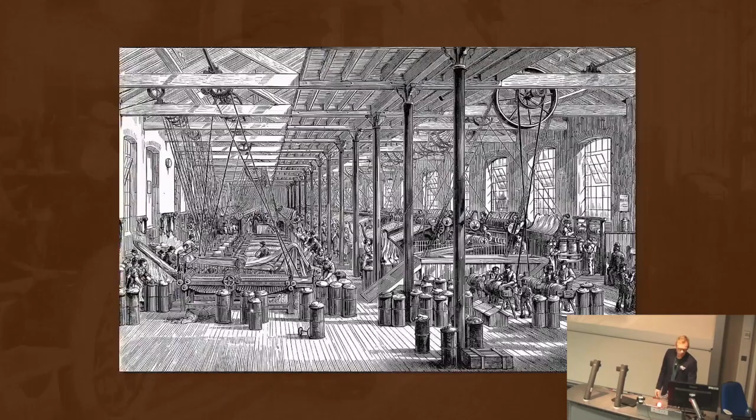So most of us here can agree that the Industrial Revolution was incredibly important in mechanizing society, specifically through the invention of the engine, not only for our production systems, but also for personal mobility. It wasn't affordable to everyone, so then came along Henry Ford, who said, I want all my workers to have a car and be able to afford that. So with the invention of the assembly line process, they were able to bring production costs down to make not electric vehicles, not yet, internal combustion engine vehicles available to everyone.

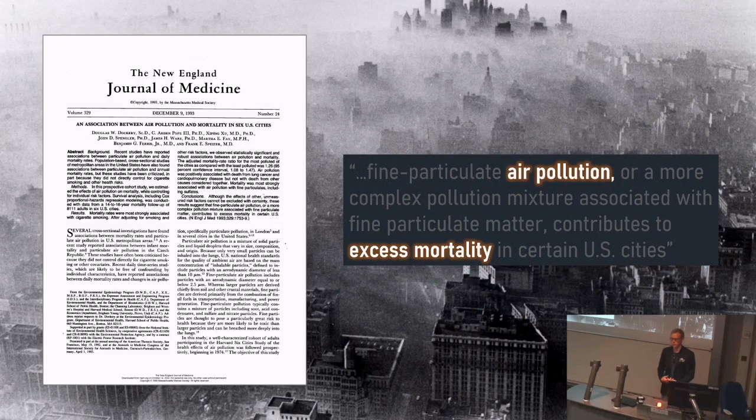So things were going so great until our cities started to look something like this, with a lot of air pollution and a lot of smog. Critical studies were coming out that were linking air pollution to excess mortality across all of our cities. So we needed to do something about this. Lots of Clean Air Acts were introduced everywhere. For automotive, this meant that the tailpipe emissions got regulated. The fuels also got regulated to remove particles that can cause air pollution as well.

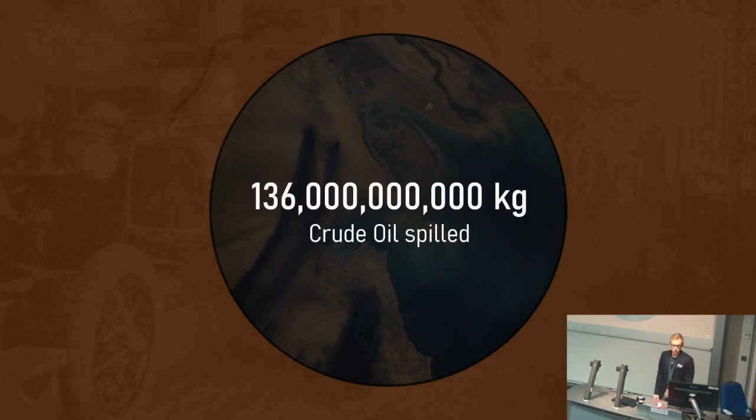So surely now things were going great. And it's not as if there's something else on the horizon like fossil fuels that could be a bit of a problem. And yep, you guessed it. Oil, fossil fuels was becoming a problem, specifically with oil spills in the popular media happening all across the world. One example is in Kuwait, where in the Gulf War, through the conflict, lots of oil wells got set on fire, spilled a little bit of oil, and for some of those days was responsible for 2% of global CO2 emissions just from those oil wells, to give you the scale of this.

So all these geopolitical issues with oil were a problem, specifically for the economy, with fluctuations in the price of oil, which was wreaking havoc. It was also getting a little bit warmer, and actually the planet was getting pretty hot as well. So we also now had the problem of greenhouse gases.

But it's okay. We had the Kyoto Protocol that rallied multiple nations together to tackle climate change. We had technology come out, such as the first hybrid electric vehicles, to try to limit these greenhouse gas emissions. And then we had the really big Paris Agreement to really reinforce national action to limit climate change. You know where this is going. Things are going really great.

So nations were committed to limiting greenhouse gas emissions. However, big corporations, such as ExxonMobil, knew about climate change a really long time. And they loathed that they knew about it, because it wasn't really so good for them. So they hid it for a really long time, and even funded climate denial groups to delay the inevitable.

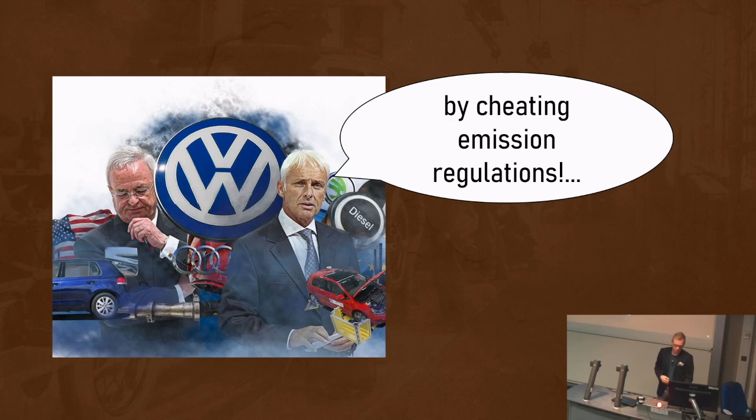People in automotive here might recognize this, the Dieselgate scandal, where Volkswagen were essentially saying their vehicles ran on clean diesel and had low emissions, but actually they were installing cheating devices to get past these regulations, and the air pollution was actually a lot more toxic than first thought. So we are also living in the greenwashing era, which wasn't too good.

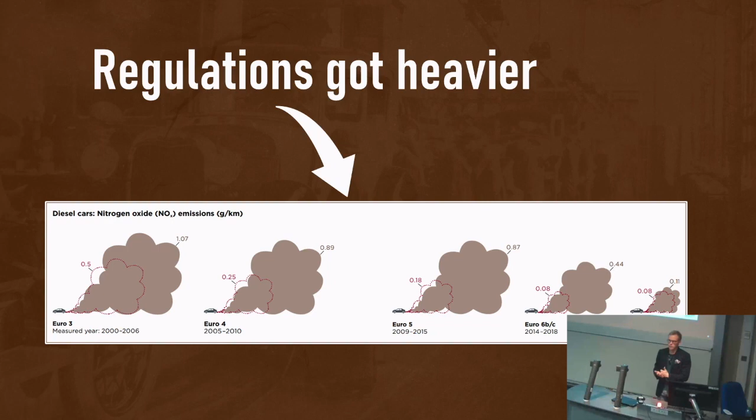So the culmination of all of these factors led, for example, the EU to really bring the hammer fist, specifically on limiting tailpipe emissions as much as possible. And over time, we saw the NOx emissions from vehicles come down per kilometer. Combustion even got really political. As we know, from 2030, multiple regions in the EU are going to ban combustion engine vehicles.

So we're seeing the market share of combustion engine vehicles, at least in the EU, come down, and electric vehicles going up. So we're going to eliminate all tailpipe emissions. We're going to eliminate all fossil fuels. So things are going very great. So following this trend, now we talk about electric vehicles.

So one of the biggest drivers, of course, is greenhouse gas emissions and climate change. Transport in the EU contributes 26% of greenhouse gas emissions. Most of these are caused by road transport, not aviation, coming from tailpipe emissions when you combust the fossil fuel, and the dependency on fossil fuels in the road transport sector has made it one of the hardest sectors to decarbonize as well.

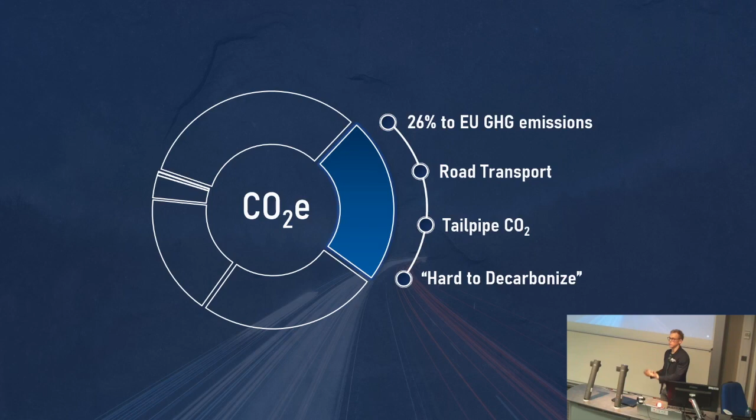So in the EU, in 2019, we introduced the European Green Deal, which was essentially the EU's major response to climate change, where they said by 2030, we want to cut greenhouse gas emissions by 55%. By 2050, we want to reach net zero. And there are 9 different action routes introduced across different sectors.

For transport, this was the Sustainable Mobility Strategy, where essentially they said, yep, we do have to reduce dependency on fossil fuels and have zero emissions from any new cars from 2035 through the use of zero and low emission vehicles, with the primary strategy being electric vehicles. So let's take a look at these clean green electric vehicles that have zero emissions. So essentially, the basics of why they are different from normal vehicles that we use.

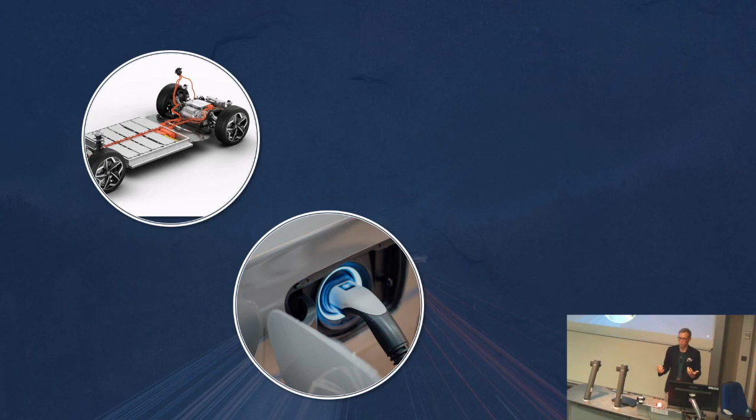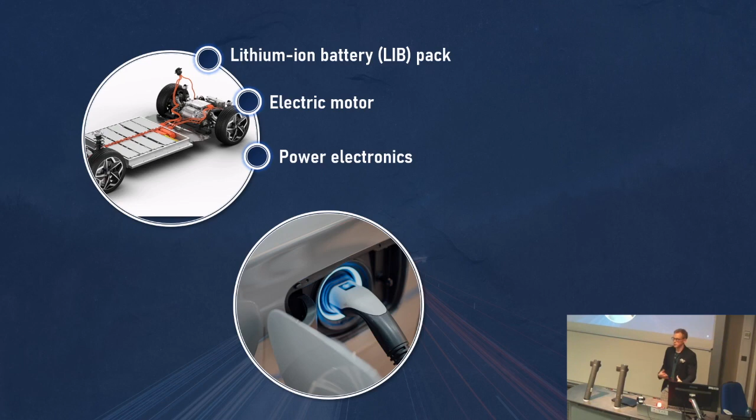We have a big battery pack that will store electrical energy, an electric motor that will propel the vehicle, power electronics to manage this whole system, and then you simply plug in the vehicle and charge it from the grid, so you're not using any fossil fuels, and there's no tailpipe emissions, which is how we arrive at the term zero-emission vehicles. So what has actually been the whole fuss surrounding them in media? I don't see any problems.

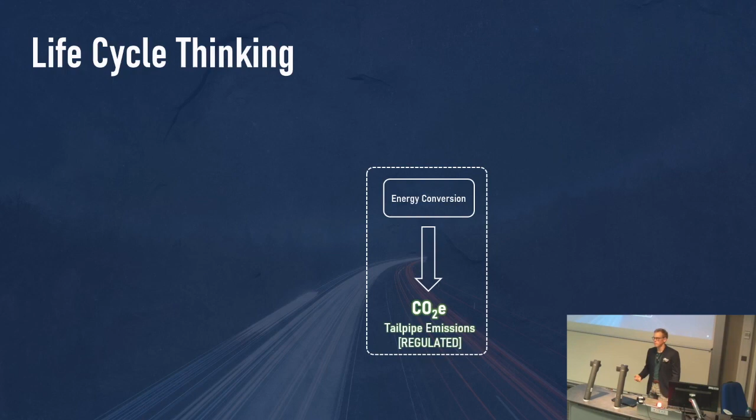And essentially, we have to apply a different type of thinking, which I like to call life cycle thinking. So we have the energy conversion step, where in a combustion engine vehicle, you combust the fuel to propel the vehicle forwards. That has very clear and very visible CO2 emissions that are quite easy to regulate. But if you travel upstream, the fuel had to be distributed from somewhere, it had to be produced somewhere, raw materials had to be extracted somewhere. All these different upstream stages will also have some sort of emissions happening. But these are quite difficult to attribute to the vehicle, so they're not regulated specifically for the vehicles in this case. And this is often called the well-to-wheels life cycle of the vehicle.

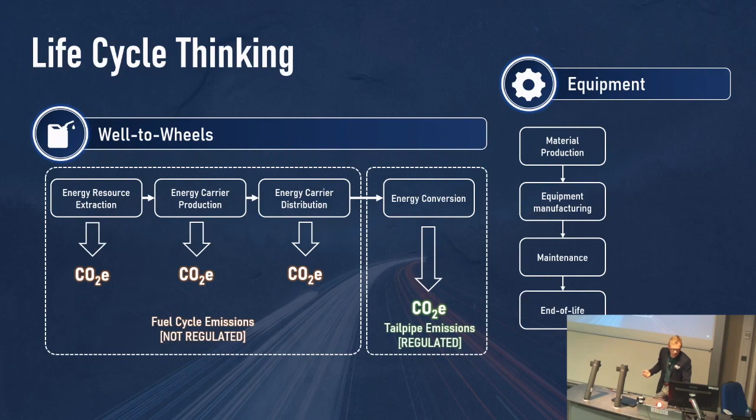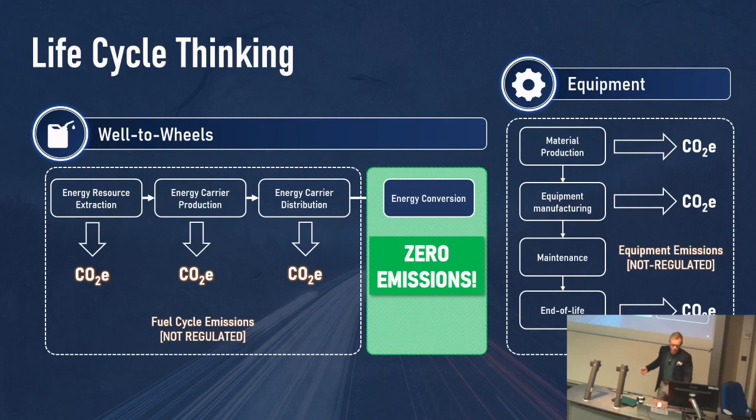But then we have to consider the vehicle itself, the equipment, where material would have had to be produced, equipment would have had to be manufactured, and then something happens at the end of life. All these different stages also have CO2 emissions, which again are not regulated. So when you put an electric vehicle in it, and we're only looking at the energy conversion step, well, of course it's going to be zero emissions, because its CO2 is concentrated in all the other aspects. So it's incredibly important for us to investigate the whole supply chain, upstream and downstream.

So here I come to some of the frequently asked questions on the environmental impacts of the different life cycle stages in an electric vehicle. I'll start off with the raw materials, and the base question of how bad are the batteries for the environment? The battery pack introduces large amounts of different materials compared to combustion engine vehicles, specifically copper, nickel, cobalt, and lithium. Now, nickel and copper are usually mined together with cobalt, so when I talk about cobalt, assume that I'm talking about nickel and copper as well.

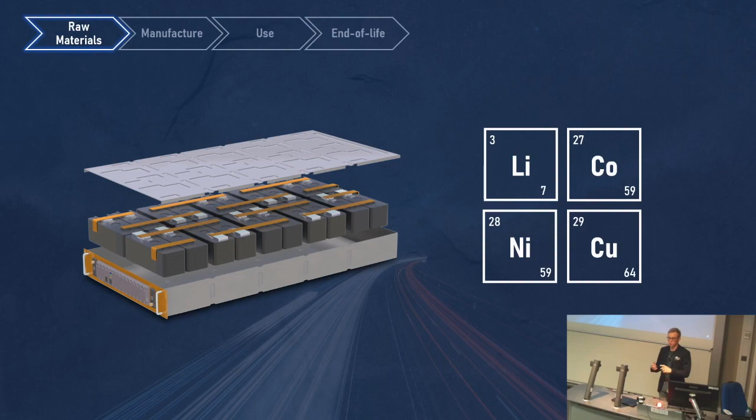So let's look at lithium. Is that scarce? Do we have enough? That has been a popular discussion, whether it will be able to meet the future demands of electric vehicles.

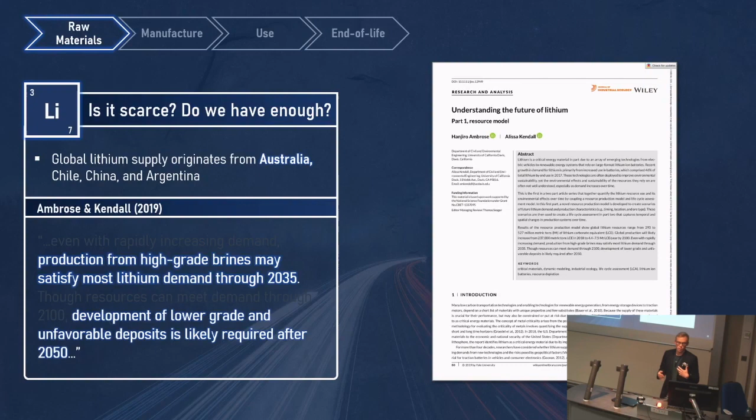So, most of the lithium actually comes from Australia, but some comes from Chile, China, and Argentina, and is distributed among these regions. Based on some academic articles, they do find with their modeling of supply and demand of lithium that essentially up to 2035, we should have enough high-grade lithium, but after 2035 and beyond 2050, we will still have enough lithium, but it will have to come from lower-grade ores.

Essentially, to simplify this, we've got enough lithium, but as we go on, we'll need to mine it harder and process it more. Something maybe that's not talked about as much is the water problem of lithium.

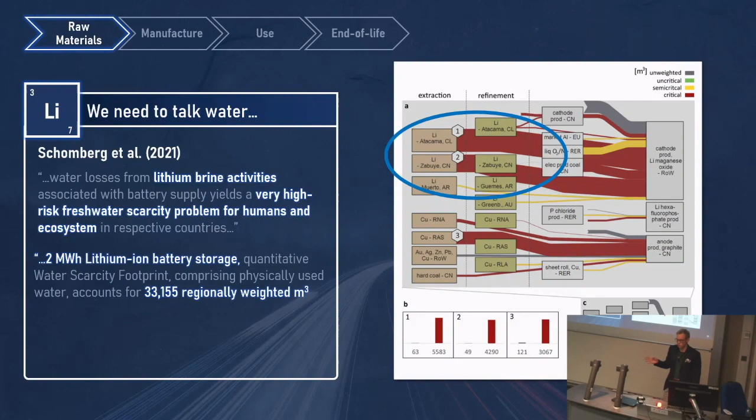Based on one study where they tracked the water use of lithium through the battery supply chain, they find that in regions where lithium is mined, freshwater scarcity is a big problem for both humans and the local ecosystems. And based off the battery system that they analyzed, essentially it was a lot of water. So to put that in perspective, to produce 1 kilogram of battery, you need around a ton of water. The amount of lithium that is in that battery is around 50 grams.

Now, to convert this a bit further and compare with water consumption of some other products, this would put lithium carbonate, the mineral, at using 20,000 liters of water per kilogram, making it probably the most water-consuming product on the planet compared to other minerals as well as agricultural products. But that is only one paper, so that could be a problem.

And essentially, the lithium mines look very beautiful and very pretty. But why they use so much water is that it relies on evaporation techniques to get the salts out.

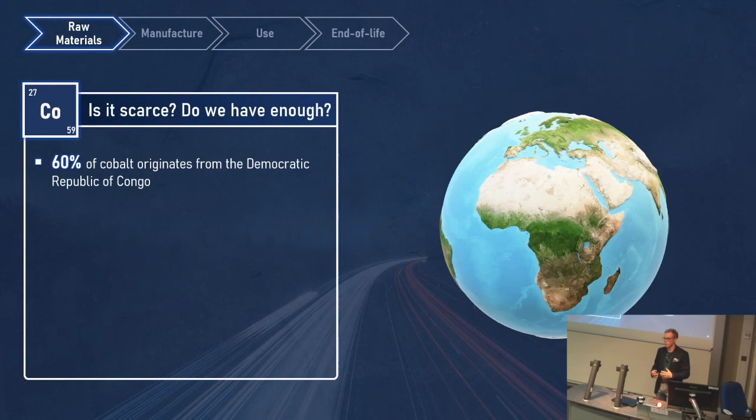What about cobalt? Is that scarce? Do we have enough of that? Well, in this case, 60% of cobalt comes from the Democratic Republic of Congo, because most of the world reserves are concentrated there. And it has been a problematic element. Historically, its price has fluctuated all over the place, and supply and demand has been quite difficult due to geopolitical problems in the Democratic Republic of Congo.

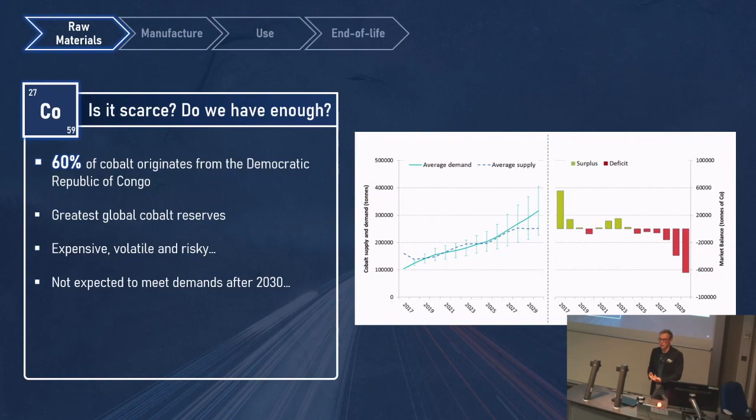And it's actually projected that after 2030, we might not be able to meet the demands of cobalt, as we might be running out of it. So we have maybe seen in popular media that many mining companies are now exploring deep-sea mining of cobalt, where they have these big rocks at the bottom of the seabed that you can harvest and get cobalt from. But knowing our history with oil, this might not be the best idea to go down.

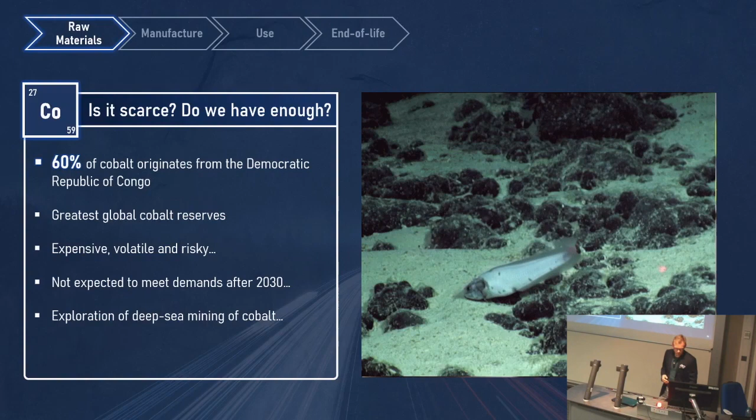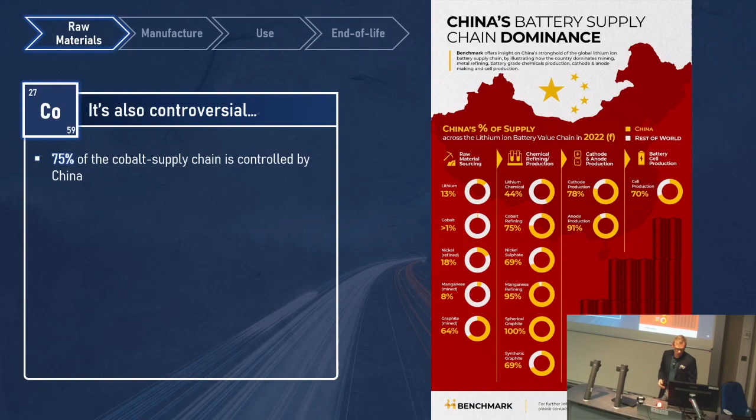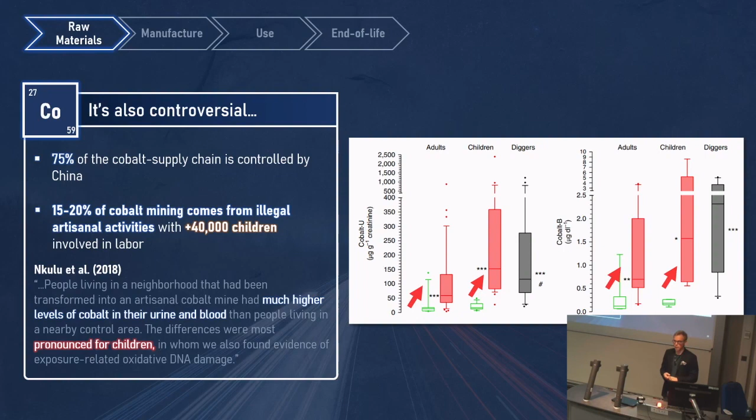In fact, based on some studies that have gone out to test the toxicity people might be experiencing in these mines, they have found that people here have much higher levels of cobalt in their urine and blood, specifically pronounced in children. So that is quite a problematic issue we are experiencing in cobalt supply chains.

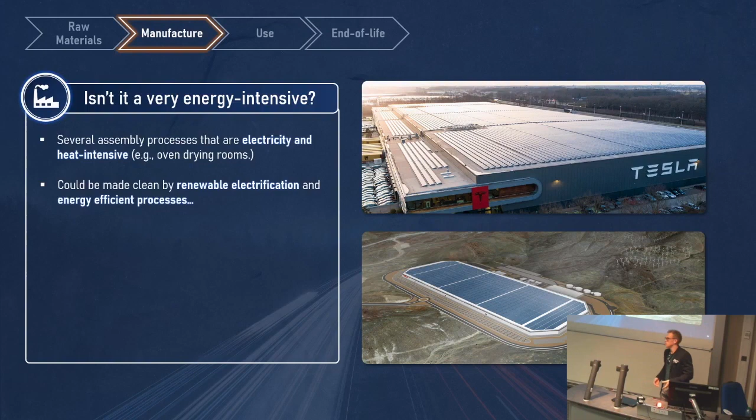So let's move on to the manufacture. One of the most common questions is, isn't it a very energy-intensive process? Well, the simple answer is yes. Without giving any numbers, the assembly process involves a lot of electricity being used, and we have to do a lot of drying with ovens that uses a lot of heat. Now, you could say that could be made clean by renewable electricity and energy-efficient processes, such as Tesla's gigafactories and their army of solar panels.

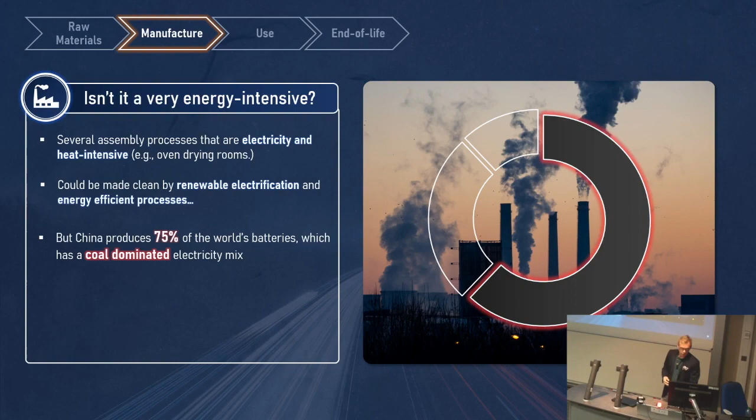But let's remind ourselves that 75% of batteries are coming from China, which has a coal-dominated electricity mix with one of the highest carbon footprints. But that might be a bit difficult to say, because some battery manufacturing plants might be located in hydro-based regions of China, which have a really low carbon footprint, although it's quite difficult to regionalize this.

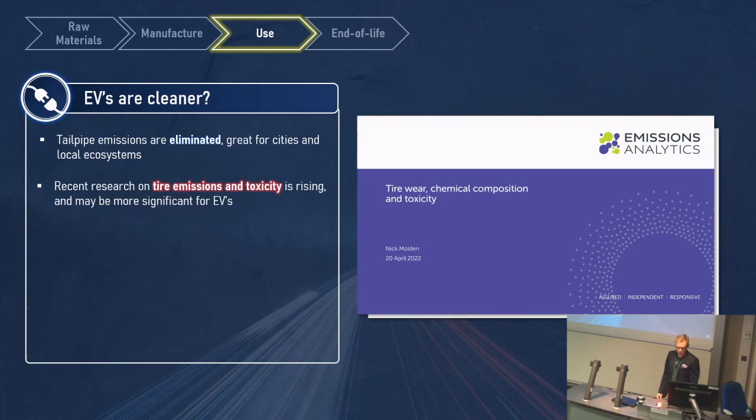So moving on to the use. So when we're using electric vehicles, are they cleaner? The simple answer is, well, yeah. We eliminate all the tailpipe emissions, which is great for cities and it's great for local ecosystems. However, recent research that is being done by Emissions Analytics finds that tire emissions and particles from tire emissions might be quite toxic to local populations as well.

And this might be a bit more problematic for the electric vehicle because it is heavier, it has more tire wear, which can lead to more tire emissions. Although we are quite uncertain on this, and this is quite new research that needs to be investigated.

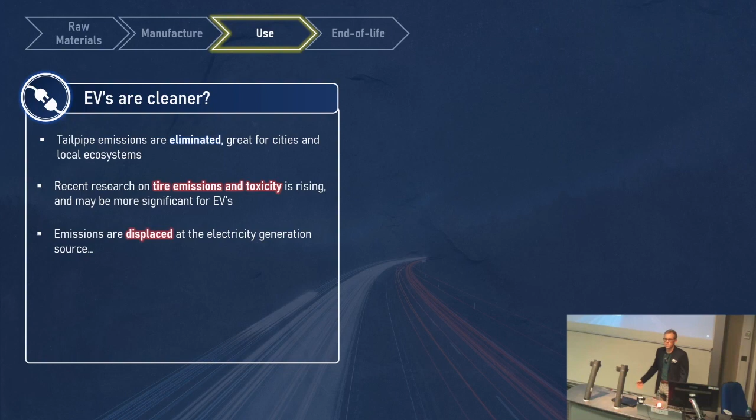But also, when you plug in your EV, of course it doesn't have any tailpipe emissions, but you simply displace those emissions to wherever the electricity is being generated. Is that coal? Is it natural gas? Is it solar? Is it nuclear? These might vary regionally and might vary at the point in time that you're charging an electric vehicle. And all of these will have different emissions factors. So we're uncertain of what the carbon footprint of our EV use will actually be.

So moving on to the end of life, what is going to happen with all the batteries? One of the most common questions I usually get. The answer is I don't really know, because a substantial amount of electric vehicles only entered the market in 2015. Older models of lithium-ion batteries will last maybe 8 years, but the newer models might last up to 20 years. So we haven't actually gotten to this stage where we have high volumes of batteries to do something with.

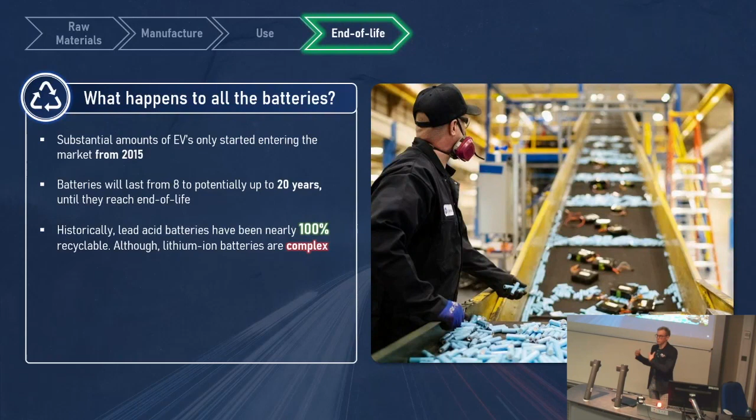Historically, it could be optimistic, because with lead-acid batteries, we have achieved 100% recycling rates. But the batteries we are going to have to deal with now are a bit more complex to process. Luckily, there are recycling routes that are being developed for this, and these can be categorized into 3 areas.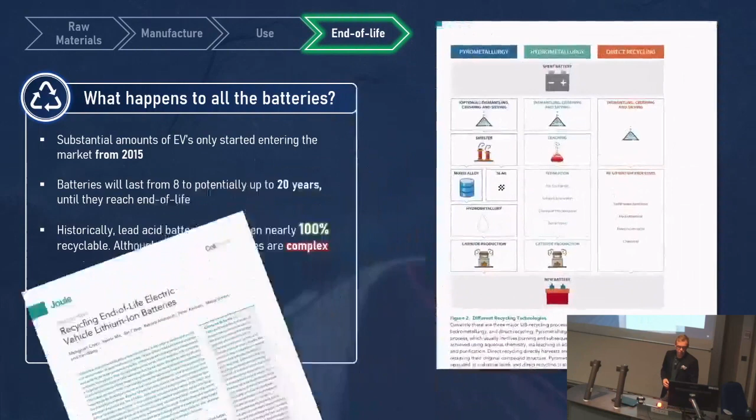One is pyrometallurgical recycling, that can be quite difficult to say, which is essentially a high-temperature process that is really scalable, where you can chuck in loads of batteries, smelt them, and essentially recover valuable materials. But it's quite energy-intensive, so it's not so good environmentally.

Hydrometallurgical recycling uses chemical processes to extract materials at a finer level and higher recoverability, but it's quite difficult to scale that to multiple battery chemistries. Direct recycling uses no chemicals or heat, and it's based on physical processes that can recover battery materials essentially intact, which is really good, but this is the least scalable process that we have. But we do have options.

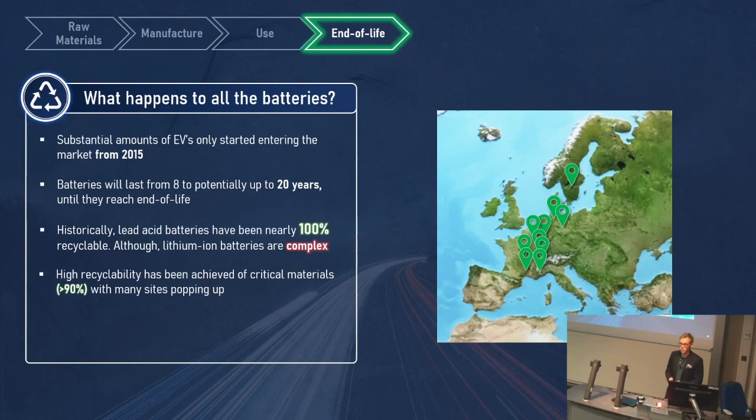And all over Europe, these recycling methods, which do have high recyclability rates, are popping up. So it looks like we are getting prepared for the potential mass waste of batteries in the future. However, we went straight to recycling. What about the application of some circular economy aspects, such as potentially reusing or remanufacturing the batteries?

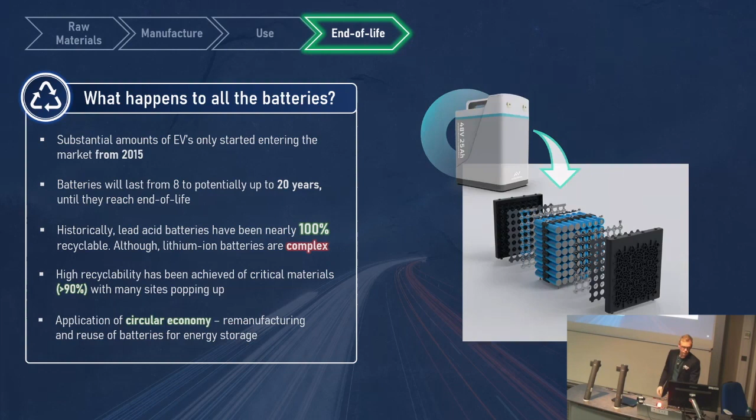It has also been found that once batteries are spent in the electric vehicle, they still have some remaining energy capacity that could be used in lower demand applications, such as energy storage. But overall, this is quite uncertain, and it's mostly based on small pilot-scale examples, so it could be difficult to say what happens at the end of life.

In the EU, we are doing something about this, notably through the Circular Economy Action Plan, where battery producers will need to have, for example, a minimum recycled content in their batteries. They will need to have transparency in the supply chains of how they got the materials and how they are going to sustainably source them. They will also have the carbon footprint of these batteries, which is also really good.

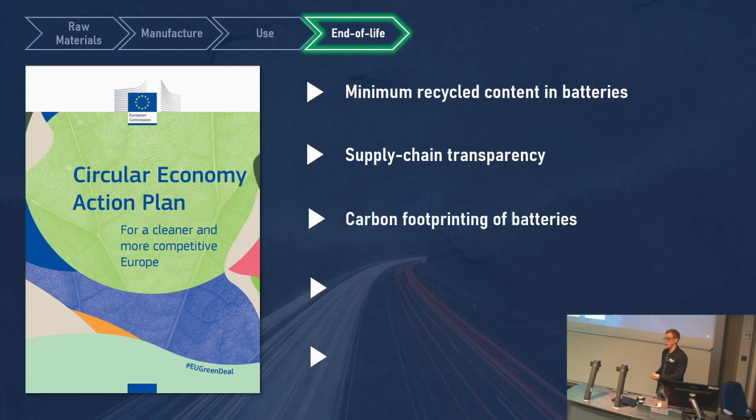And they will have extended producer responsibility, where after the consumer is done with the battery, the producer of the battery will be responsible for collecting that battery and doing something with it at the end of life. As well as promoting the remanufacturing and reuse supply chains.

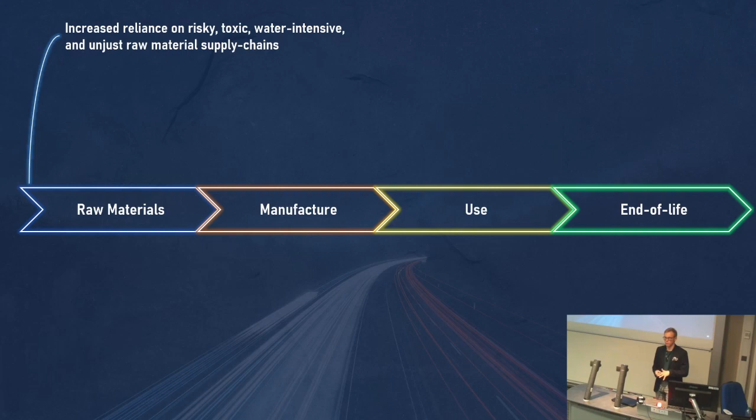So, a lot of different stuff is happening across the supply chain, so let's bring it together a little bit. We know with electric vehicles, we increase the reliance on some problematic raw material supply chains, which means we need to be thinking about designing problematic materials, such as cobalt, out of our batteries. We need to build transparent and responsible supply chains to make sure we're not exacerbating inequalities elsewhere. And we need to go beyond climate change and start measuring and mitigating potential toxicity and water scarcity problems as well.

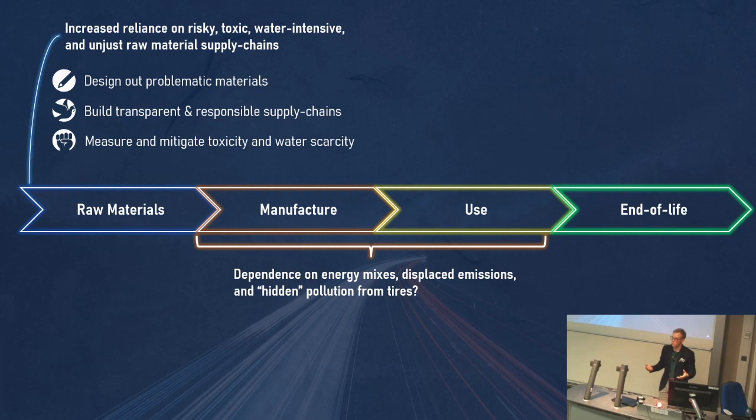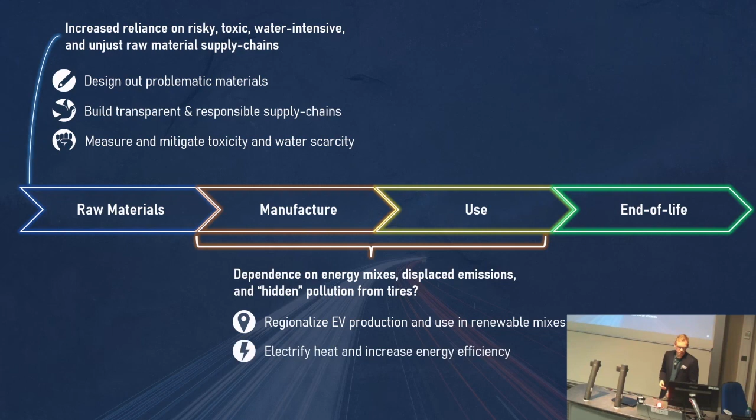Throughout the manufacture and use, we know that impacts here depend on the energy mixes or where we displace the emissions, as well as potentially hidden pollution that we don't know about coming from the tire emissions. So we need to regionalize electric vehicle production and use to be making use of renewable systems wherever possible. And we need to electrify heat that can be quite hard to decarbonize, as well as increasing energy efficiency of assembly line processes. And we need to think about measuring and mitigating tire emissions because we don't know much about it at this point and its potential severity to human health.

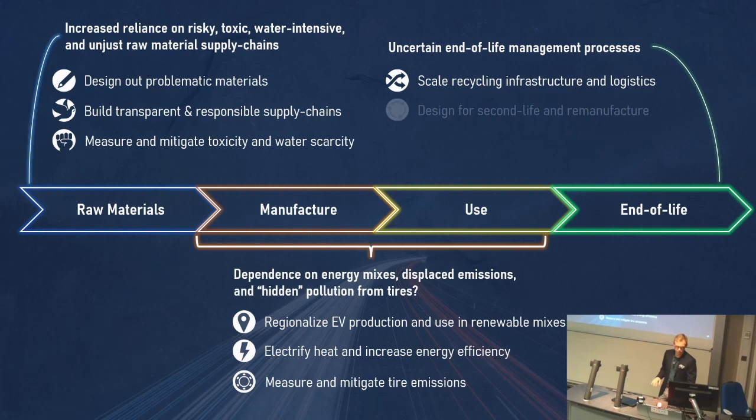At end of life, the management processes are pretty uncertain, but that also means we need to start scaling recycling infrastructure and logistics now. And we need to start thinking about designing for second life and remanufacturing to scale the circular economy. And on that note, establishing cross-sector partnerships to make sure that the automotive industry is collaborating with the energy storage industry to enable the circular economy routes as well.

So, when we come back to the question if electric vehicles are as green as we think, at this point things are looking a little bit red. However, it's incredibly easy for me to stand here, pick out articles, and point out problems in anything, not just electric vehicles. But until you actually measure it relatively, how can you actually determine the severity of these problems? And how do you know when to act on these problems? So this is where we come to talking about life cycle assessment, a way to actually quantify some of these problems.

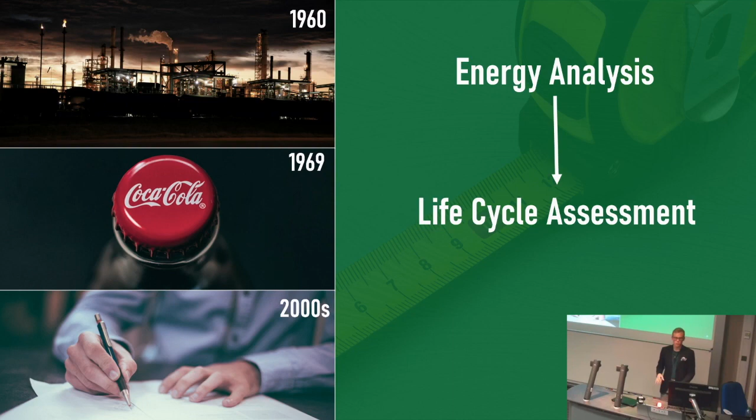So, incredibly oversimplified history. In the 1960s, when we were having environmental problems all over the world, that yielded the first energy analysis methods to try and quantify some of these problems, which later led to life cycle assessment, with the first one being conducted by Coca-Cola. So there's your fun fact. But a lot of these LCAs, life cycle assessments, being done were not really standardized. So it's only in the 2000s that we saw these methods become unified and standardized to make sure everyone's carrying out life cycle assessment

in a unified way. Essentially, the main standards are ISO 14040, which describes the principles and framework of life cycle assessment, and the other one is ISO 14044. Sounds like I'm giving my phone number. And that essentially sets out the specific requirements for how to collect data and so on. These are the two standards you really want to remember if you want to go into lifecycle assessment, because all other standards that you might see for product labeling or communication of environmental impacts stem from those two top standards, which are essentially the fundamentals.

So what do these standards actually say? Well, the very basics was this: each LCA needs to be very clear about their aims and what they are going to do with their results. In the inventory, how they should be collecting specific data. In the impact assessment, how do you transform that data into environmental impacts? The interpretation phase, what do the results actually mean, in addition to adding any other extra analysis, before doing something with the results. So in practice, what does this actually mean? So here's a little crash course.

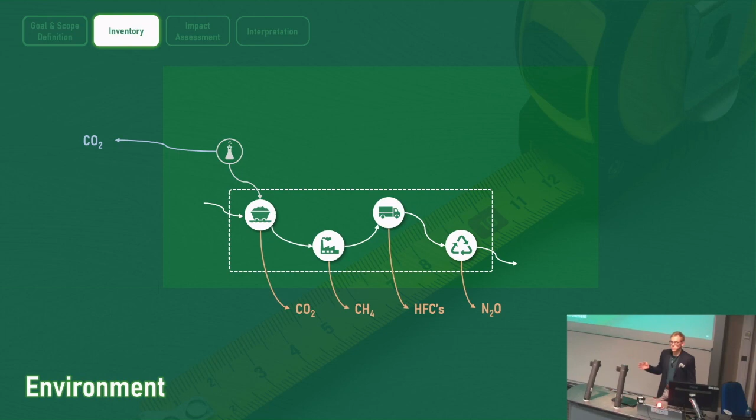So when we come to the inventory, say we've collected all the data we need for our system, which is, for example, different greenhouse gas emissions that are happening. So you might think, okay, that's now quite simple to put into environmental impact somehow. However, for example, the raw materials might need some inputs coming from a third supplier that is not necessarily in our supply chain. That input, say a chemical that's being used in raw materials, has some type of emissions. And also before that, upstream the supply chain, it needs a precursor which also has some type of emissions.

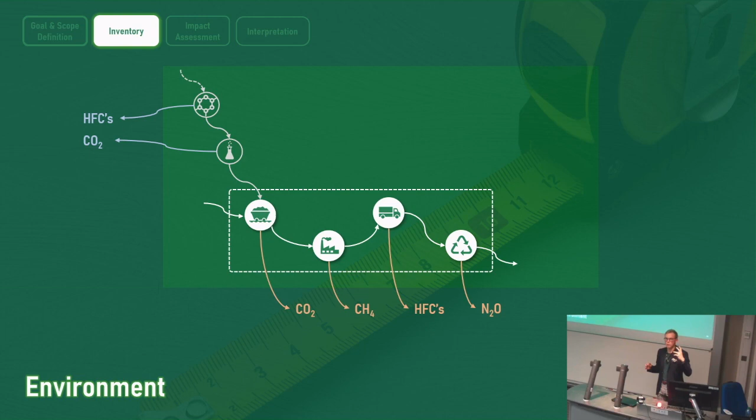Okay, so the demand for a product has created some emissions upstream. And how do we actually attribute those input emissions to our product? So right now it looks like it could be quite simple. But then you consider the manufacturing step needs some electricity generated elsewhere which has emissions. That needs natural resources that have some emissions.

Oops, it turns out that that same electricity generation supplies the chemical production step, which complicates things a little bit further. In the transportation, you need some packaging to be done, which has some emissions. Oh, it turns out also some of that same precursor supplies to the packaging production, which complicates things a little bit further. For the end of life, you may need some heat production happening, which also needs some natural gas produced, which has, again, emissions upstream.

It also turns out that the heat production supplies the packaging production, and the natural gas is being used as a precursor for the precursor production. And to complicate things and make our job even harder, some of the recycled material goes back into the packaging production.

So it was my job to confuse you?

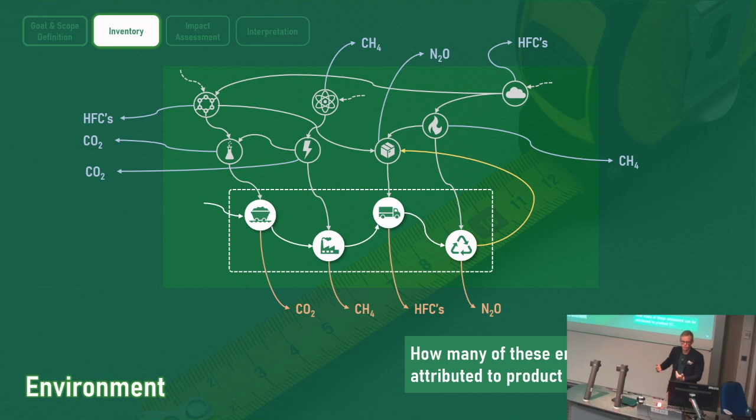Absolutely. So essentially, how do we attribute the demand for a product or the emissions happening upstream? How many of these emissions are we causing? Luckily, we don't have to figure this out now. Essentially, this can be grouped into the background system, so whatever happens upstream or downstream. We have derived a specific set of rules in the LCA community to follow how to attribute these emissions, and we have databases and software to solve it all for us. So then we can say there is a specific amount of CO2 coming from the background system.

Okay, so we have our inventory data. What happens in the impact assessment step? Essentially, our impact is global warming potential, which is the amount of heat absorbed by a specific gas that is standardized to be measured in kilograms of CO2 equivalents. Now, what does that mean? We have some CO2 equivalents coming from the background system. We have some CO2 coming from the raw materials.

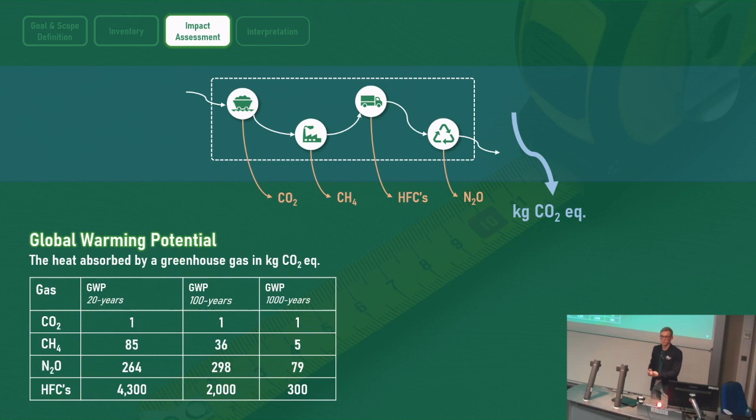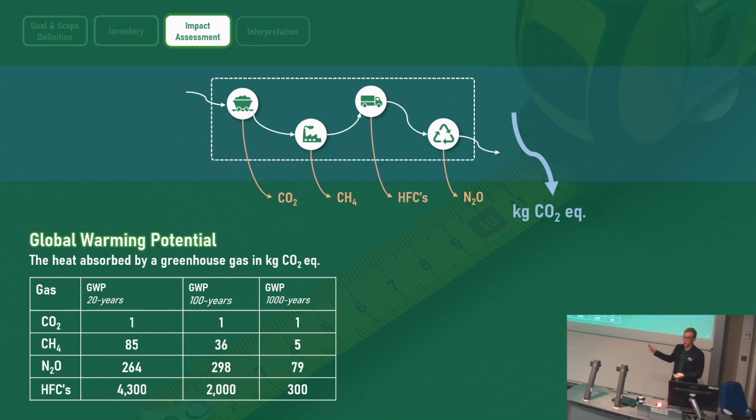But what about the other gases? How do we convert this into CO2 equivalents? Well, this is where we apply characterization factors, where other gases might have a greater global warming effect than CO2. So of course CO2 is going to be one, but something like HFCs, hydrofluorocarbons, can have a much greater global warming potential. So we apply these characterization factors and get our emissions into CO2 equivalents.

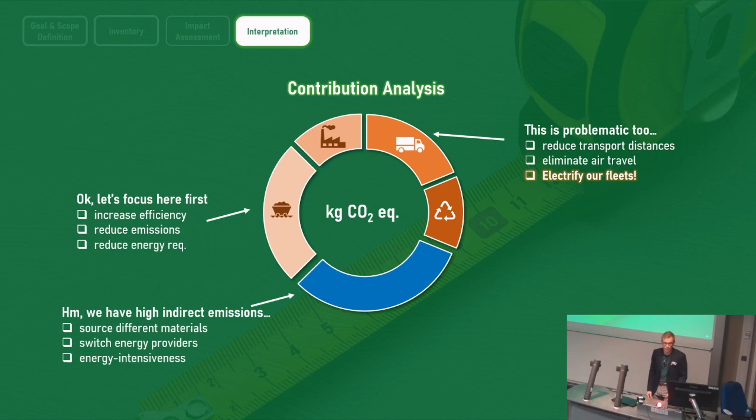So this is definitely not an LCA training course, so please don't try this at home. But if you want to talk about LCA or how to get good at it afterwards, I'll be happy to help out on that side of things.

So let's come back to EVs and let's apply some life cycle assessment to some of the problems that we have been discussing. I've selected 3 papers based on how recent they are and based on how, in my opinion, robust they are as studies. But there are hundreds of papers in the literature on this topic, so I would encourage you to look at them afterwards. The first one is based on a Hong Kong case study that compares electric vehicles, internal combustion engine vehicles, and plug-in hybrid electric vehicles. So let's zoom in specifically into the production impacts in this LCA.

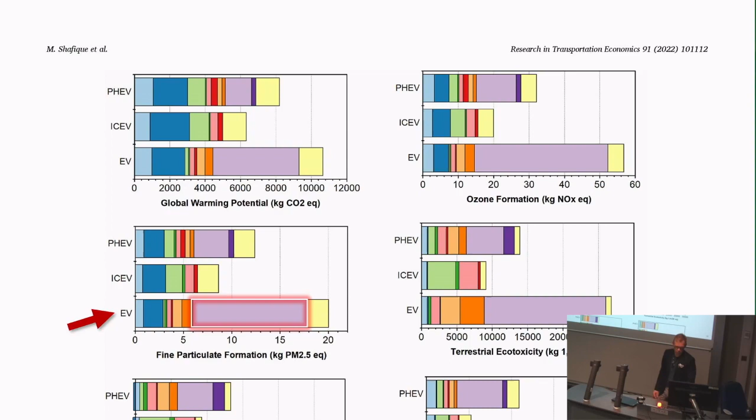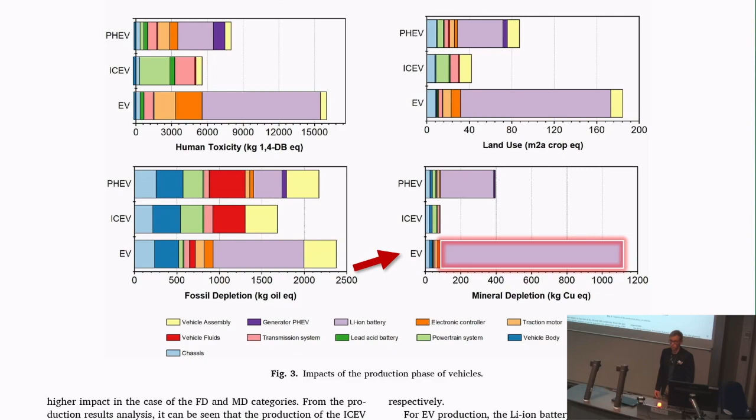We see with the EV that it has a much bigger production impact compared with the one above, which is the internal combustion engine, coming from the pink purple bar, which is the lithium-ion battery. That same trend is seen in the fine particulate matter formation impact, again, from the battery. In human toxicity, again, the production impacts are much greater for the battery. And in mineral depletion, wow, that is quite a lot greater coming from the battery. Okay, so that's the production impacts.

Let's look at purely the use phase impacts. In this case, focusing just on global warming potential, the bottom bars, the blue ones, are the internal combustion engine, and the green ones are the electric vehicle being used in different years. What do the different years mean? They represent different electricity mix systems in Hong Kong.

In 2019, it represents a fossil-based grid using natural gas and coal, whereas 2050 is mostly renewable energy at 85%. So essentially here we can see that the EV being used in 2019, even with a fossil-based grid, still has lower use impacts compared to the internal combustion engine. We generally see something similar with fine particulate matter formation, although in 2019 the use of the fossil grid still has quite high impacts because the coal is still air polluting.

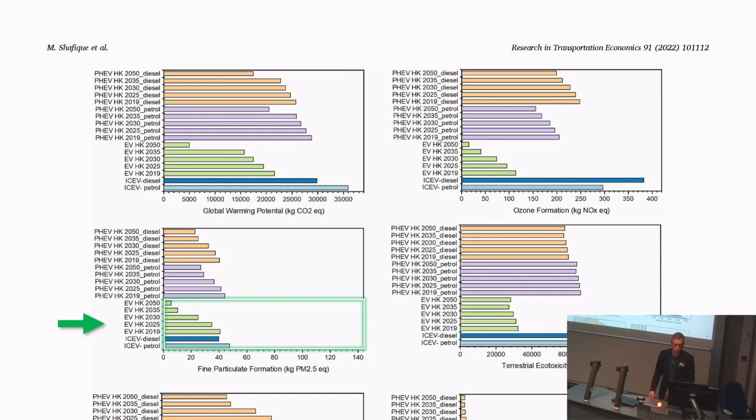For toxicity, it's bigger and lower in some points, but this won't really matter once we combine the production impacts in a minute, and the same applies for mineral depletion. So we don't need to analyze this further. So let's combine the production and the use phases and see what happens. For the global warming potential, the EVs at the top versus the internal combustion engines at the bottom, we generally see that with renewable energy systems, they do become much lower in global warming potential.

For air pollution, initially, in the fossil-based system, in the EV HK 2019, it is a little bit higher because coal is still being used as the electricity generation source, which has some air pollution. But again, with renewable energy systems, the air pollution does become a lot better. For human toxicity, we now see the EVs at the top being much higher impact, again coming from the production phase. And the same is seen in mineral depletion, with EVs being much worse.

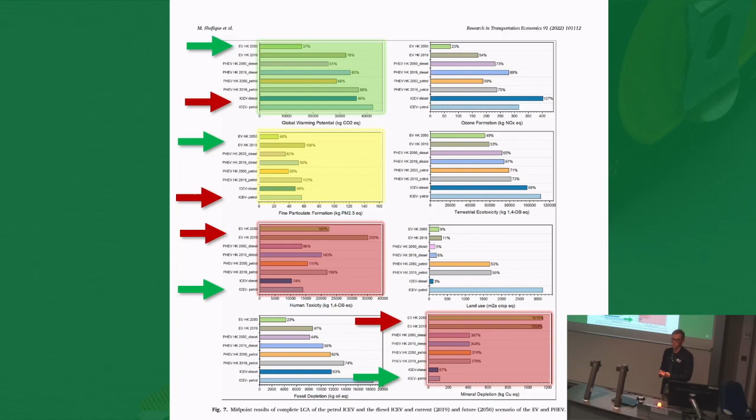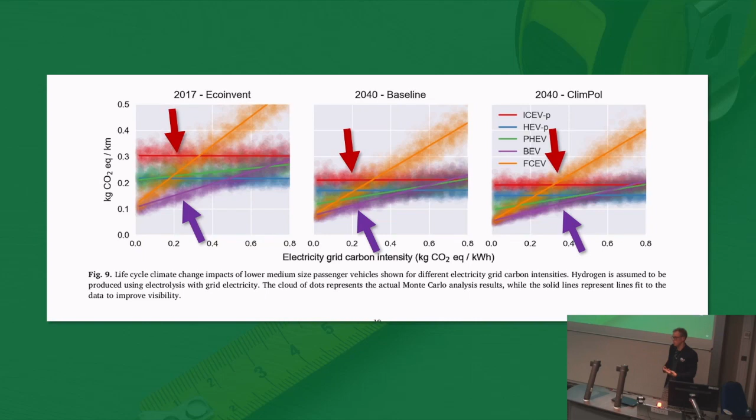Now that's a nice study, but it's a simple case based on Hong Kong. So we can look at a different study that looked at different electricity carbon mixes and their impact on the life cycle emissions of different powertrains. In this case, the red line is the internal combustion engine vehicle. The purple one is the battery electric vehicle. And it applies for the other graphs, which are slightly different scenarios, which I won't go into too much. But essentially, when we increase the grid carbon intensity even up to 0.8 kilograms of CO2 per kilowatt hour generated, the EVs still end up doing better than the internal combustion engine, even in high carbon footprint electricity grid mixes.

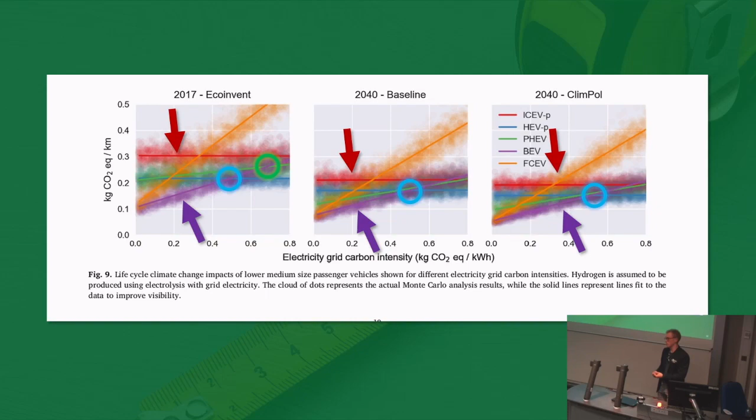But what is interesting is we see these blue and green lines in high carbon mixes actually become better than the battery electric vehicle. And these are hybrid vehicles. So it turns out hybrid vehicles in high electricity carbon mixes might actually be better than battery electric vehicles. So maybe we shouldn't fully transition to that technology and still make the best of both worlds of internal combustion engine vehicles and battery electric. So let's look at some specific regions where this might happen.

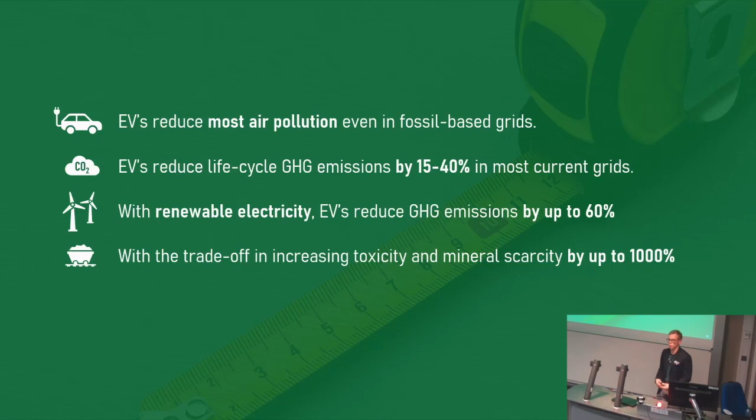So the question really is, is that good enough to address some of the environmental problems that we want to address? Well, coming back to some of the stuff we discussed in the Circular Economy Action Plan for responsible supply chains, increasing toxicity by 1,000% is probably not really aligned with that. And also from the European Green Deal, we want net zero greenhouse gas emissions by 2050. Here we're only reducing them by 60%, which essentially means we go from 10,000 kilograms of CO2 being emitted to maybe 5,000, but that is still not good. So essentially, how can we achieve net zero carbon emissions and address some of these problems?

Essentially, for the use phase, we can decarbonize that completely with renewable electricity, but production, we can't really. So why is it that 100% renewable electricity cannot decarbonize the whole battery supply chain production systems? And what could we do about some of the other impacts? And this is where I do a little bit of self-marketing for a paper that I've been working on with my research team.

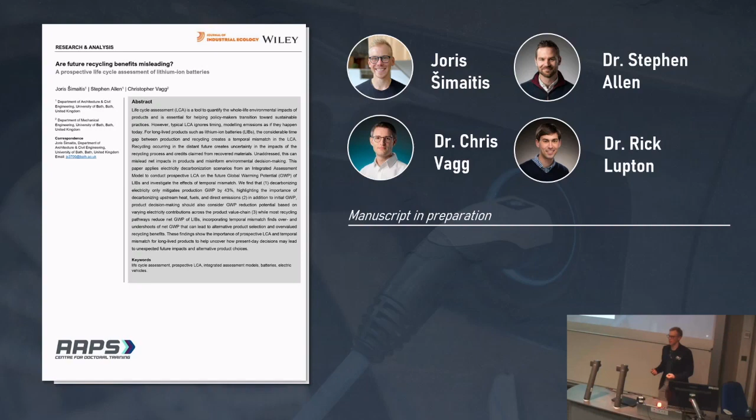Well, what I have essentially been doing is future-based life cycle assessment of lithium-ion battery production and recycling. And there are some insights that I can draw from the work that I've been doing of how difficult it is to decarbonize production value chains for batteries. So in this simple case, I'll talk about only 3 batteries.

One is an iron phosphate lithium-ion battery, which essentially the point of it is it removes critical materials, so that could be quite good. Then we have the nickel manganese cobalt battery, which has historically been one of the main batteries used in the EV industry. And then we have a nickel cobalt aluminium battery, which uses less cobalt than other batteries usually, and is quite a high performance battery. So what do the production value chain results show?

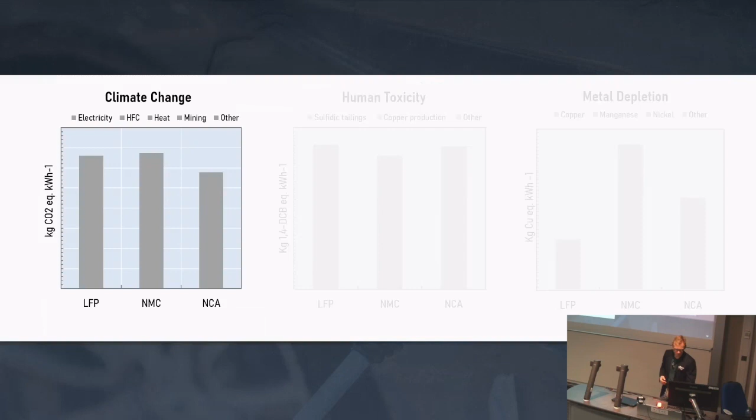So for climate change, essentially all the batteries have a relatively similar carbon footprint. And we see that electricity throughout, this is the whole supply chain, contributes to around 50% of the climate change impacts, which is quite interesting. And actually quite a chunk comes from HFC emissions, fluorinated hydrocarbons, essentially coming from direct emissions that are not caused by electricity. A chunk of it comes from heat production, which again is quite hard to decarbonize with electricity. And some of these emissions are coming from direct emissions from mining, such as the use of fuels for big infrastructure.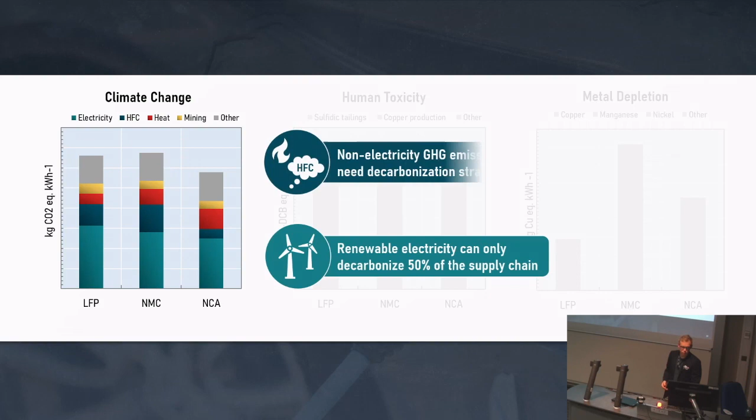So from here, what we can see is one of the reasons renewable electricity can't fully decarbonize battery production chains is because it only can decarbonize 50% in this case. And we need to place more focus on the non-electricity greenhouse gas emissions, which we often maybe don't talk about, which is fluorinated hydrocarbons, heat, and activities from mining that really need decarbonization strategies to achieve net zero.

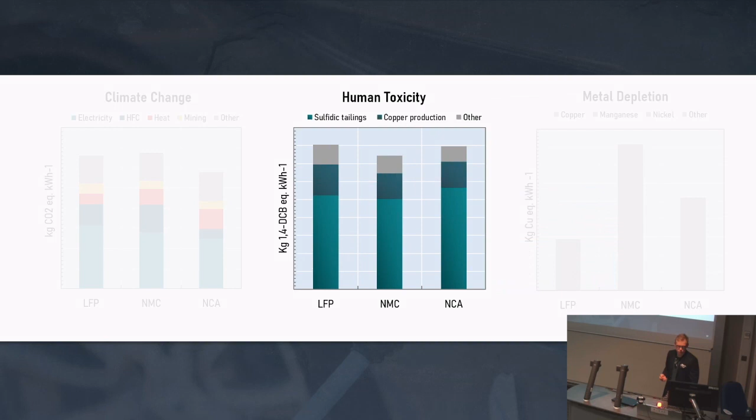When we look at human toxicity, we quite simply find that for all the batteries, one of the biggest contributors is sulfidic tailings, which are essentially coming purely from mining, which is land and water emissions of arsenic, selenium, lead and manganese, which are not too good, and are often linked to copper production as well. So here, quite simply, we validate the toxicity risks we have been talking about are concentrated mainly in the mining activities.

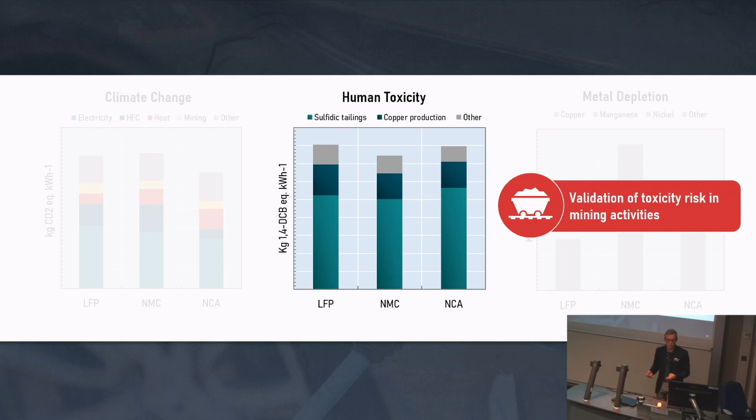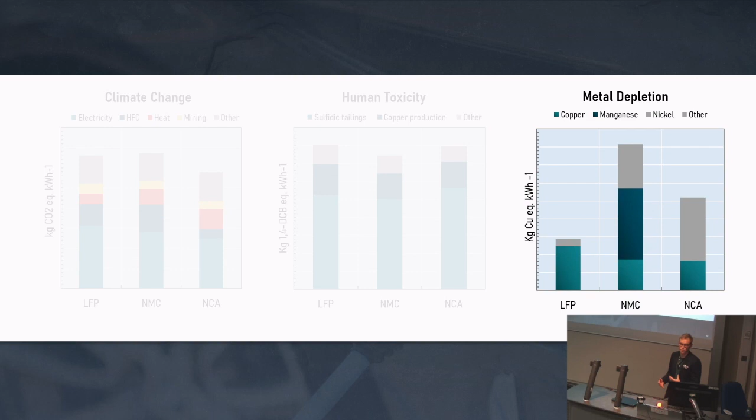For metal depletion, we do luckily see that the LFP, the iron-based battery, is doing quite a lot better, hopefully as expected. And for all the batteries, copper is still a contributor in the metal depletion, but in this case, for nickel-based batteries, manganese is a bit more of a problem, and so is nickel.

So the things we can capture from this is, interestingly, in these calculations, cobalt never showed up. I was quite surprised by this, but essentially it might be that the methods that we have for characterizing cobalt to metal depletion might not be there yet. But we do see that the iron-based chemistries, which eliminate critical materials, are doing so and are reducing the metal depletion categories, so actually removing these materials could be a good thing.

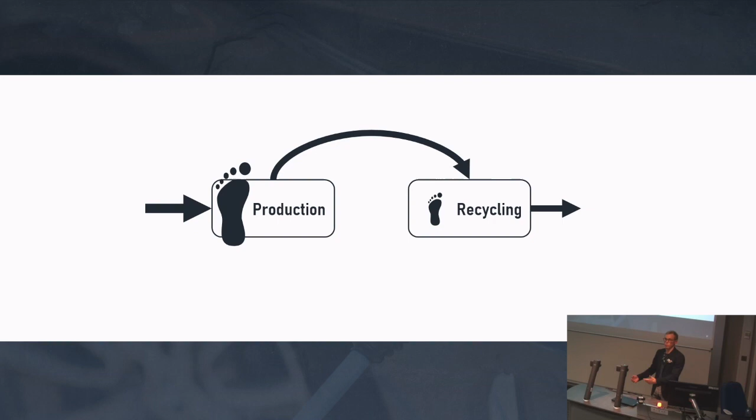So how about recycling? Could that be a potential strategy for mitigating some of these impacts? Well, in basic theory, if we produce something and use it and then recycle it, there will be some waste produced, but we will also maybe recover some material to put it back into production. What it means for the net impact is it can potentially lower the environmental footprint.

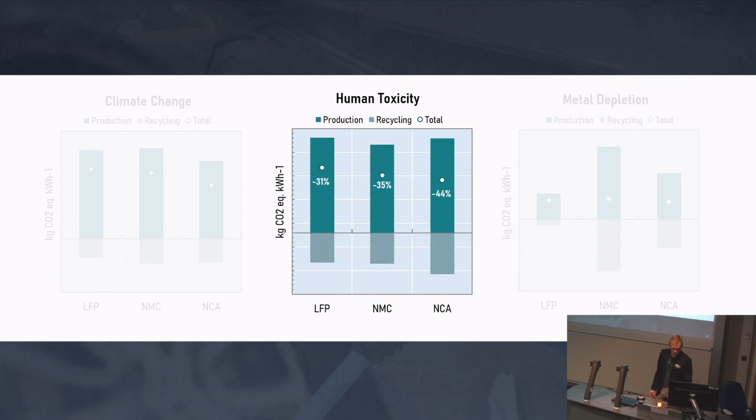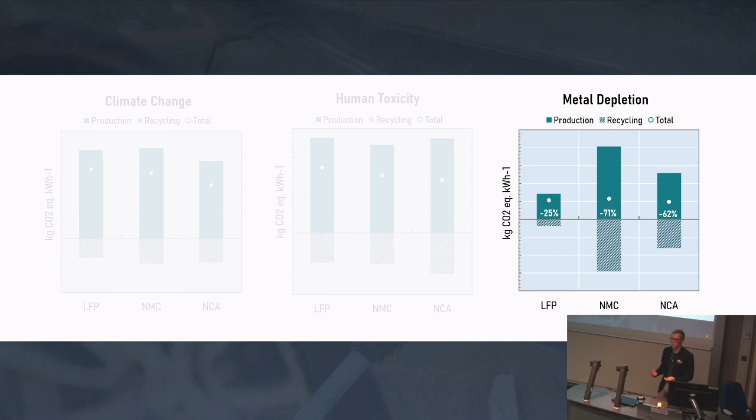So applying some of these principles under only the best case recycling scenario, we find that for climate change, it could probably reduce the carbon footprints of the battery productions by maybe a third. For human toxicity, this might be up to nearly a half, which seems really good as well. And for metal depletion, especially for the batteries using critical materials, it could be up to 70%. So seemingly, recycling is a good strategy for some of these environmental impacts. So the best case scenarios look pretty good if we utilize recycling to recycle batteries in the future.

However, there is something wrong with what I just said. This is flawed, because how we do LCA currently and how I did it in this case assumes that both production and recycling are happening in 2020. We know that the battery reaches the end of life maybe 10 or 20 years later in a future system. So we should probably be modeling that, right?

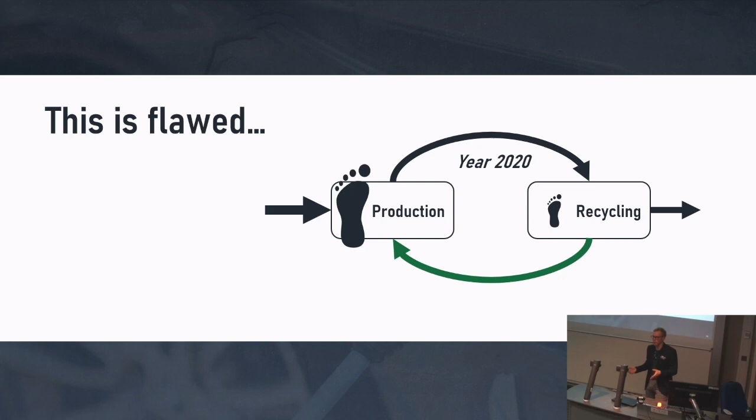So essentially, to describe this, we're going to assume we're producing the battery in 2020, and we're going to recycle it in 2030. So the initial case that we had is wrong, because we are not recovering the material and displacing the demand in the original production process, which had a high carbon footprint, to reduce its net footprint as well.

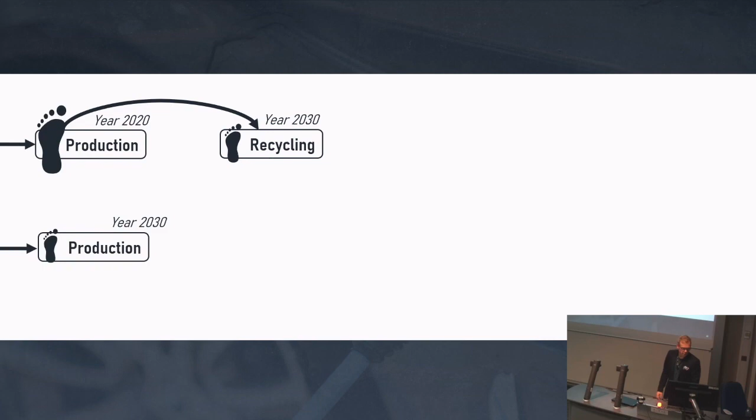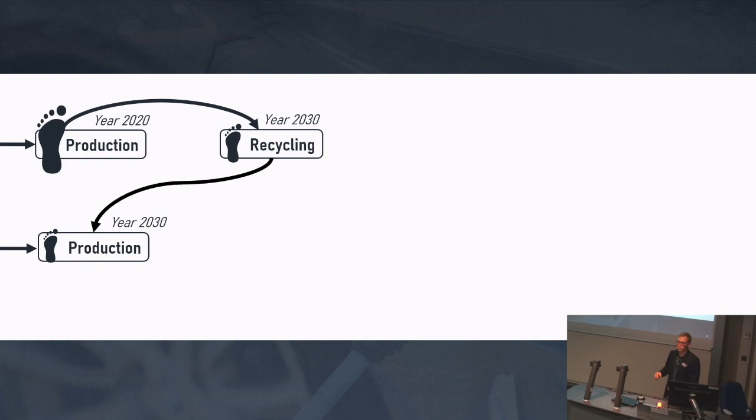What is actually happening is the recycled battery will displace material in a future production process, which might already have, hopefully, a lower environmental footprint as we decarbonize our systems in the future. This means the net impacts of our original process, the reductions aren't as big as we think.

And the impact is actually higher than originally thought, because we don't have as big recycling benefits as we think. Assuming it's recycled 20 years later, in 2040, we are underestimating the impacts by maybe 20%, and so on. So really, this is to highlight that recycling could be a good strategy, but depending on how future systems evolve, it might not be as beneficial as we think.

And it could be quite a misleading strategy, meaning we need to focus more on mitigating production impacts rather than trying to somehow offset these in a future system. It's a bit like planting a tree now, saying you're net zero carbon, but that tree hasn't grown yet and you don't know what will happen to it. But that's not to stigmatize recycling.

So to summarize from these insights, what can we actually do about the production impacts in reducing greenhouse gas emissions towards net zero? Well, renewable electricity will only get us halfway there. We need to consider achieving net zero through decarbonizing direct process emissions that are not electricity-based, decarbonizing heat, maybe through green hydrogen, and fuels such as synthetic fuels in specific mining processes.

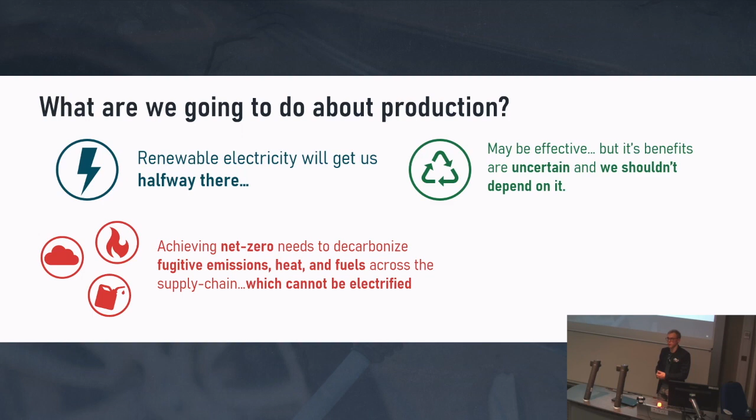Recycling may be effective, but its benefits are quite uncertain, and we shouldn't really depend on it. And lastly, yes, we want to solve carbon emissions, but in solving it, we don't want to create disaster elsewhere. So we need to make sure we're accounting for other environmental impacts, such as toxicity or resources.

Okay, I have done so much talking. Essentially, I've talked about everything I know as a PhD student and some of the research I am doing, but there's a lot I haven't spoken about, and there's a lot of things I admit I don't know, and you might know even better. But let's try to answer this question: are electric vehicles as green as we think? Electric vehicles, as most things, are pretty grey, as it always has been.

Nothing's actually been green. It's only in recent years that we have the power to capture the complexity of these problems. We know the complexity goes deep into the supply chain that's interconnected, and that could only be solved by collective action. So sustainability is really hard because there are so many interdependencies. And it gets even harder when we want to be working with all actors in the supply chain to limit carbon emissions. This gets more overwhelming and complex when we want to consider other environmental impacts. How are we going to mitigate those? What kind of trade-offs will we actually allow?

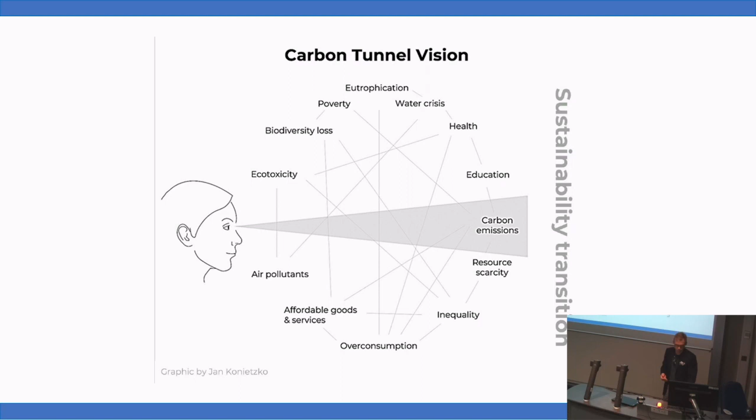So that might be quite overwhelming, but it is my belief that we have also never been in a better position to address these environmental problems. Hopefully from this talk you have seen that we now have tools to use as a targeting system for complex environmental problems, so we can enable innovation in technology and policy to solve them. And most importantly, there is a new generation of people who are very ambitious and willing to act to secure a new future for us, and sustainability for the planet, the people, and achieving prosperity.